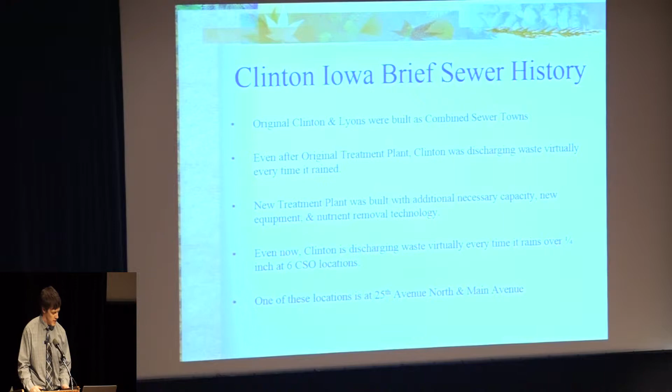It's difficult when you talk to a council about a stormwater treatment project—they already know we have combined sewer issues and sanitary sewer issues. So to get a stormwater project funded is a big deal. We had to use a lot of creativity with this project.

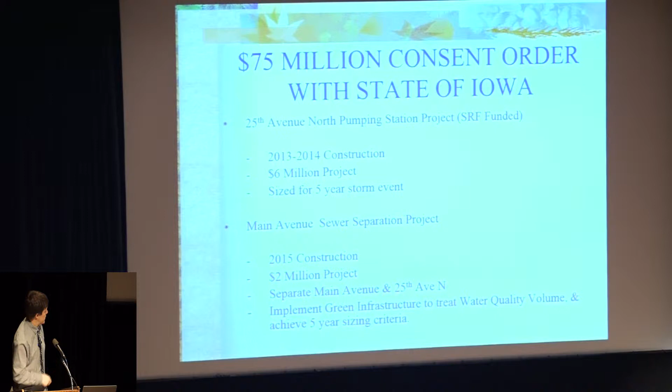We have a $75 million consent order with the state of Iowa and the DNR that includes the project I'm talking about today. It was actually a $2 million separation project along Main Avenue, one of our downtown areas of Clinton, Iowa. This is the drainage basin.

This is Main Avenue right here. The entire basin was set up as a combined sewer basin draining to this point. This green square represents a combined sewer pump station.

So under dry weather, we pumped all of the sanitary flow from this basin. This green line represents a force main down to our treatment plant. And virtually every time it rained above a quarter inch, this was not able to keep up, and so we overflow to the river.

So part of our consent order is to separate this basin—a $2 million project to separate the downtown area. A lot of the other outlying regions of the basin have been separated naturally, but the remaining sub-basin is represented by this orange polygon. It's about a $2 million project.

As I said earlier, I was inspired. I attended a couple seminars in Cedar Rapids on green infrastructure and stormwater treatment applications, and I was inspired to try to make this known separation project that we needed to undergo into a green infrastructure project as well as a separation project.

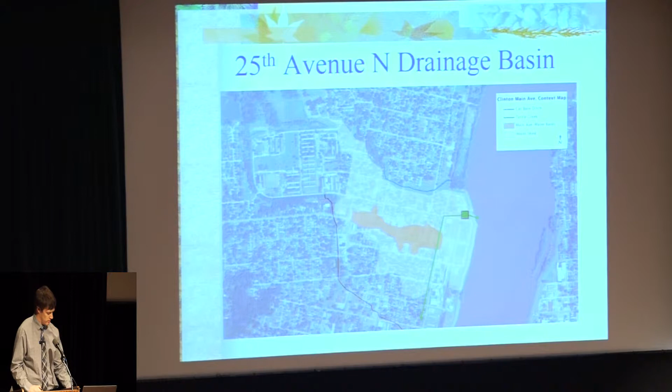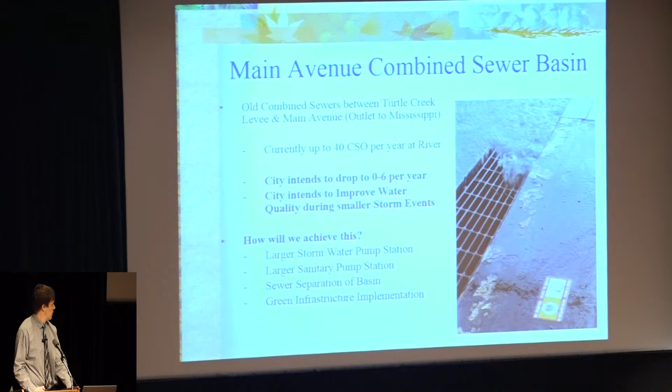So we're trying to construct a storm sewer project, a separation project through this downtown area, and implement green infrastructure practices by using that grant program. And those things were actually really difficult to sell to the community.

As you can see, Main Avenue is kind of a depressed, older looking downtown. The business owners up there and the council wanted to see a streetscape project. So the way we sold it to the community, since it does have some city costs and we weren't able to pay for the whole project with the sponsored project, was that we could create a streetscape project within this region as part of the green infrastructure project. So really killed 3 birds with 1 stone, I would say.

The basic project constructed several years ago was a new stormwater pump station and a new sanitary pump station. The setup before the separation project occurred is now pumping all sanitary waste through this force main, setting up for separation with the construction of a larger stormwater pump station that will be used exclusively to discharge stormwater, hopefully treated stormwater, into the Mississippi River. So in time, we'll drop that 40 CSOs per year to 0 combined sewer overflow.

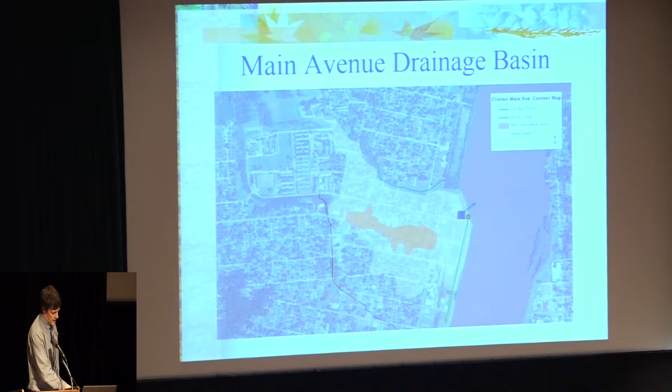The project description - our grant application tried to use as many green infrastructure applications as possible in order to construct essentially a sewer separation project and provide treatment of the water quality volume as well. So this is an overhead view of the project area.

Soil quality restoration in our park area, some Silva Cells, which are permeable sidewalks adjacent to tree planters which I'll talk about later, and a couple bioretention cells in the project area as well.

This sort of goes along with the last presentation. Per an Iowa State University study in 2006 on a parking lot where they installed some permeable pavements, we were able to show as part of the grant application that we should be able to reduce suspended solids, nitrogen, phosphorus, and heavy metals by certain standards, and we showed the potential for total pollutant removal within our grant application by each of these different BMPs.

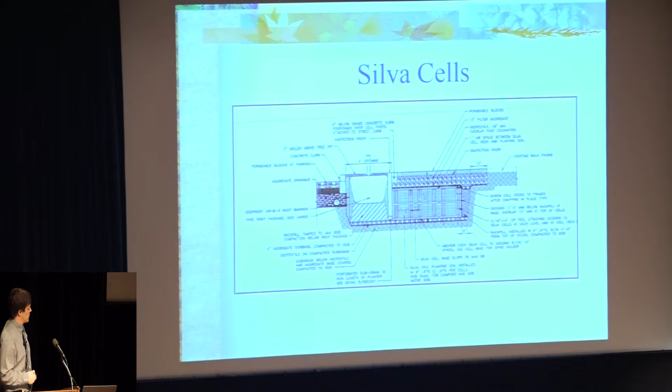And then, as I said, the loads are transferred through this structural element, allowing us to place permeable sidewalk pavers on top of the system. So the end result is stormwater infiltration up to the water quality volume that settles out pollutant loads, finds its way into our Silva Cell system. The tree soaks up a lot of the moisture, and if we get a rainstorm of above 1.25 inches, it'll overflow through this plastic subdrain pipe to the storm sewer system. So that's a major component of our project.

We also have a couple bioretention cells, which I'm sure you're familiar with. But in areas where we didn't have any parking along the street, we actually eliminated parking and installed bioretention cells in the area that would have been the parking areas. We were able to do that in 2 city blocks.

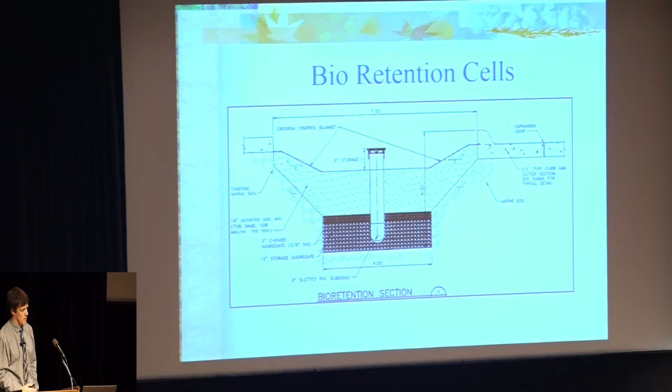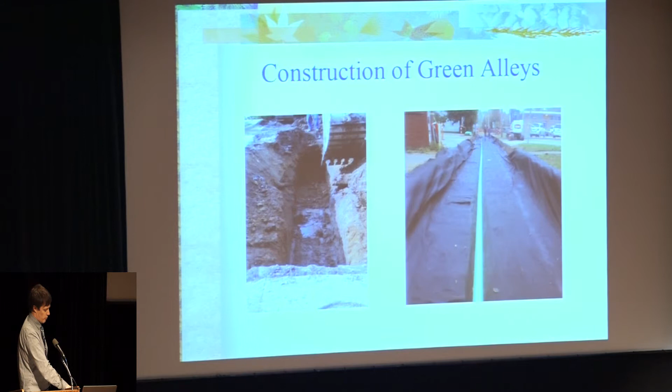I guess I should back up and say we found a lot of clay subgrades during our soil tests, so we weren't able to totally filter a lot of the water into the subgrade. It's something along the lines of maybe 10 to 20%. Most of the stormwater is just treated and then overflows through this overflow pipe to the storm sewer system. And that's what the green alleys look like today.

I should have had a before picture, but before the project, it looked more like this: beat up, chewed up asphalt with a lot of ponding and straight overflows to the combined sewer system. And today, a lot of the residents and business owners are happy with the way that looks.

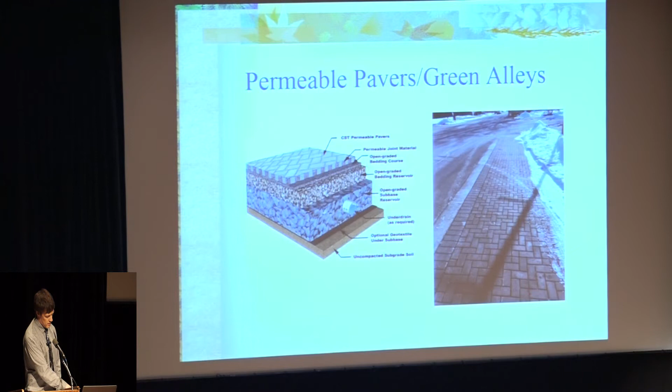In conjunction with this, underneath all of the permeable parking areas, we installed storm sewer pipes to collect a lot of the treated stormwater overflow, and we will eventually construct that system all the way down to the previously constructed pumping station. So what we will have is a separated basin with a water quality and stormwater treatment element added to it.

Some of the project benefits, like I said, we're able to now drain a portion of the smaller storms into underlying soils. We will be able to lower our total amount of CSOs to the Mississippi River by this project, improve water quality, and all by using green infrastructure. We were able to do it with grant funding, by reducing the peak runoff, and by reducing a certain amount of the total volume.

We were able to install a slightly smaller size pumping station and stormwater system downstream of this, because we knew we could knock down the peaks and store it in the rock chambers beneath the paving. So that saved us a little money as well. And the main things for the citizens of Clinton, we were able to fulfill a separation requirement that was mandated by the state, and provide the downtown area with a streetscape project along the way as well.

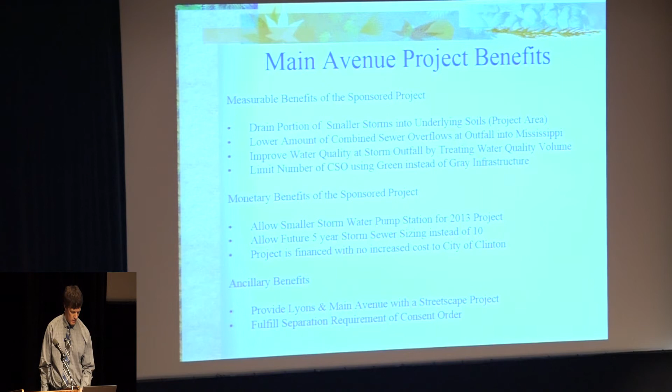So we're only about halfway done with the project, but so far it's gone quite well. Are there any questions?

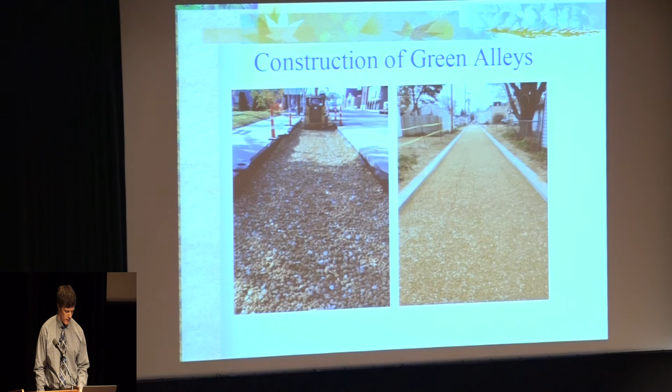Back the slide. How did you make the transition from your paver parking lanes to your main street? Is there a concrete floor there? Yeah, between the parking areas there's about an 8-foot wide concrete approach there. So the stormwater drains across that and still gets into the rock chambers once it reaches the parking area.

So we saw cut, we removed the curb totally, saw cut about 10 feet out into the pavement, dug down 3 feet, installed the rock chamber, and then poured a concrete header around this in order to construct the brick system against. And like I said, it just worked out that all of the stormwater intakes on this project were right at the end of one of these parking areas, not at the alleys. So any water that overflows from the alley is still able to make it out onto the parking area, down the block, and to the stormwater intake.